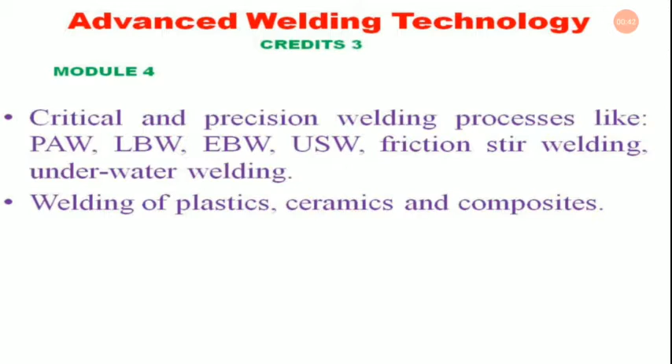So today we will be discussing this welding of ceramics and composites. Let us begin today's class. So today we will be having the class on welding of ceramics and composites.

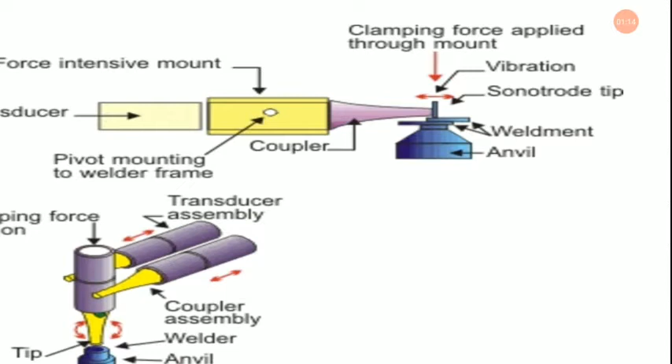So talking about the joining of ceramics, we have this thing. A ceramic material may be defined as any inorganic crystalline material compounded of a metal and a non-metal. Ceramics can be classified as crystalline ceramics and non-crystalline ceramics. Crystalline ceramic materials are not amenable to a great range of processing. Non-crystalline ceramics, being glasses, tend to be formed from melts. The glass is shaped when it is fully molten.

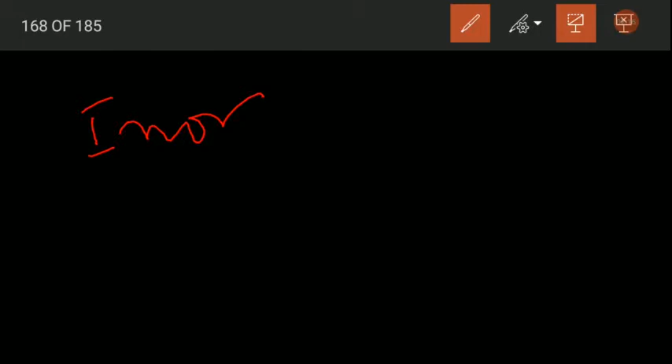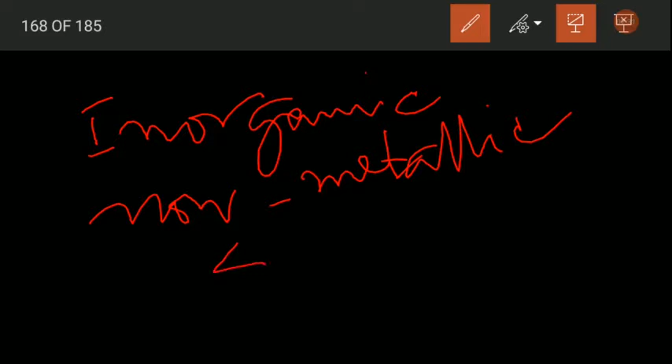Now let us have some more discussion on this basics of ceramics. Then we will move to the joining of this ceramic. So talking about the ceramics, it may be this inorganic, non-metallic, solid, made up of either metal or non-metal compounds that have been shaped and then hardened by heating to a high temperatures. In general, they are hard, corrosion resistant, and brittle as well.

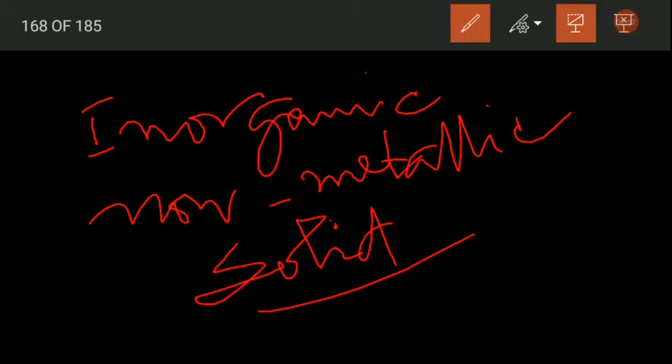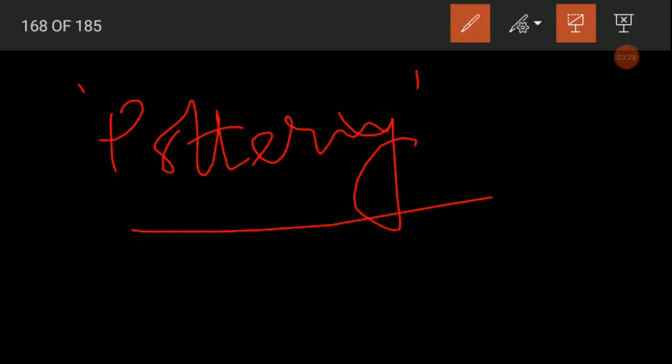Now, ceramic comes from the Greek word meaning pottery. So, ceramic means pottery. The clay-based domestic wares, art objects, and building products are familiar to us all, but pottery is just one part of the ceramic world. Nowadays, the term ceramic has more expansive meaning and includes materials like glass, advanced ceramics, and some cement systems also.

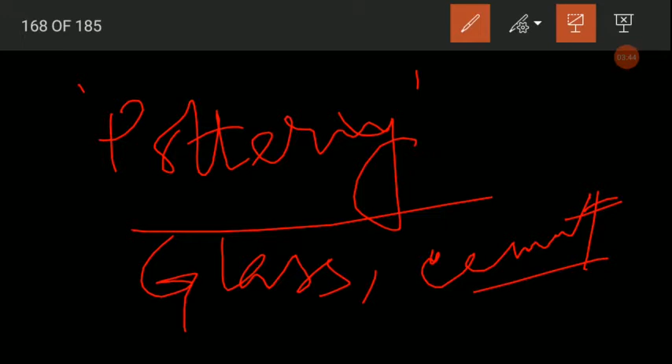Now, traditional ceramics, pottery is one of the oldest human technology. Fragments of clay pottery found recently in Hunan province in China have been carbon dated to 17,500 to around 18,300 years old. So this is the most oldest type of materials known to human being.

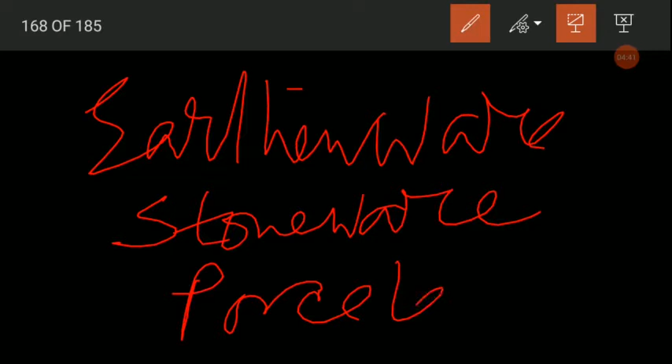Now there are major types of pottery such as earthenware, then you have stoneware and porcelain as well. So you can see earthenware is used extensively for pottery, tableware, and decorative objects. It is one of the oldest materials used in pottery.

The clay is fired at relatively low temperature, around 1000 to 1150 degrees Celsius, producing a slightly porous coarse product. To overcome this porosity, the fired object is covered with finely ground glass powder suspended in water, that is the glaze, and is then fired a second time. Faience, Delft, and Majolica are examples of earthenware.

Stoneware clay is fired at a high temperature, about 1200 degrees Celsius, until made glass-like vitrified. Because stoneware is non-porous, glaze is applied only for decoration. It is a sturdy, chip-resistant, durable material suitable for use in the kitchen for cooking, baking, storing liquids, and as serving dishes. Porcelain is a very hard, translucent, white ceramic.

The earliest forms of porcelain originated in China around 1600 BC, and by 600 AD, Chinese porcelain was a prized commodity with Arabian traders. Because porcelain was associated with China and often used to make plates, cups, vases, and other works of fine art, it often goes by the name of fine china.

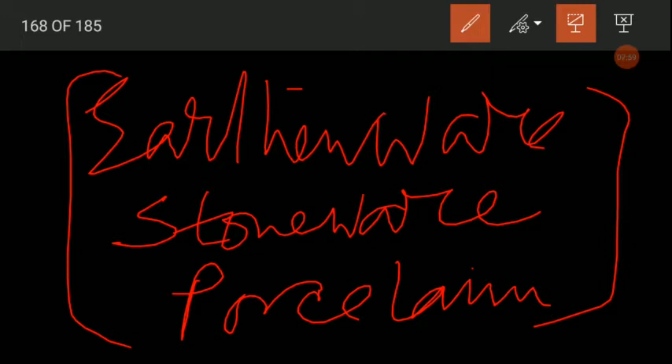Coming to applications, advanced ceramic materials are now well established in many areas of everyday use, from fridge magnets to an increasing range of industries including metal production, processing, aerospace, electronics, automotive, and personal products. In modern medicine, advanced ceramics, often referred to as bioceramics, play an increasingly important role.

Bioceramics such as alumina and zirconia are hard, chemically inert materials that can be polished to a high finish. They are used as dental implants and as bone substitutes in orthopedic operations such as hip and knee replacement.

So you can see we have a clear idea of what ceramic actually is and what are the different types of applications the ceramics are mainly associated with.

Here is a device. First, there are some classifications of the joining of ceramics. One is direct bonding, another is mechanical attachment. In direct bonding, we have two classifications: liquid phase and solid phase.

In the liquid phase, we have adhesives, brazing, and glass sealing, while in the solid phase we have diffusion bonding, electrostatic bonding, and friction welding. I have already mentioned diffusion bonding and friction welding in previous classes. As a recap, there are also many other solid phase joining processes in joining ceramics, but these are the main ones: diffusion, electrostatic, and friction.

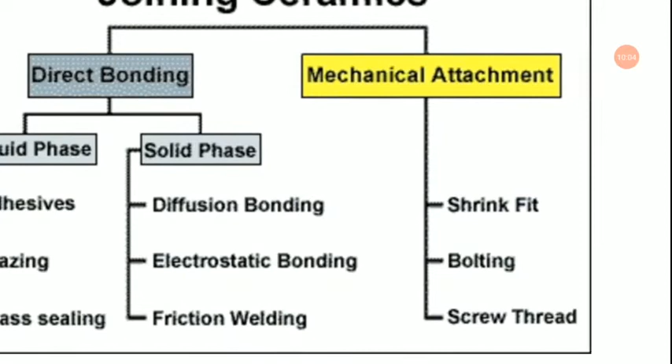Talking about fusion welding, which I have also discussed before, but to remind you: successful use of electron beam welding to form Al2O3-Ta, ZrO2-Mo, and ZrO2-Nb couples with substantial bond strength has been reported since the 1960s. However, the applicability of fusion welding methods to ceramic-metal systems is very limited, so it is imperative to match the melting temperature and thermal contraction characteristics of the pieces being bonded.

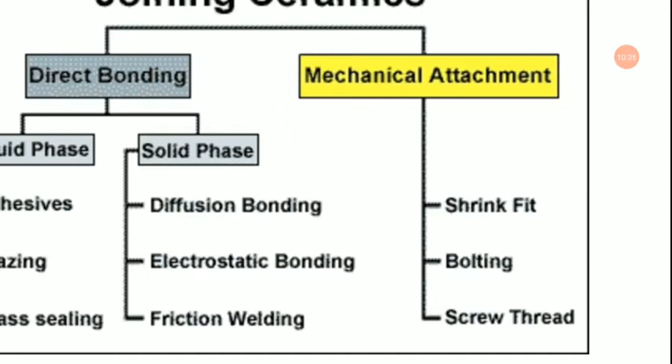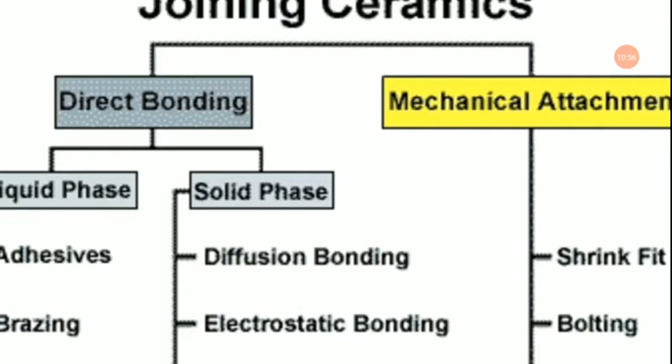Coming to friction welding, which I have also discussed previously along with ultrasonic bonding - these are extensively used in joining ceramics. Promising results in friction welding of aluminium to alumina (Al2O3), aluminium to zirconia, and aluminium to silicon nitride have been reported from Queen's University of Belfast. These three ceramics can also be welded to other metals, but sometimes it requires the use of an interlayer.

This is the interlayer. As you can see, the filler metal melts and joins with the metals. It spreads through the surface and joins through the metal - that is the joining process.

In ultrasonic bonding, joining of aluminum to a number of metals can be achieved in normal atmospheric conditions, while the joining of titanium to ceramics by the same process requires the use of vacuum.

Now talking about diffusion bonding: in this method, the components to be joined are pressed together and subjected to high temperature for a certain period of time. The pressure used must be high enough to cause diffusion to take place at the mating surfaces, but must not cause bulk deformation in the components being joined. The temperature employed is in the range of 0.65 to 0.98 Tm, that is the melting point of the metal in degrees absolute.

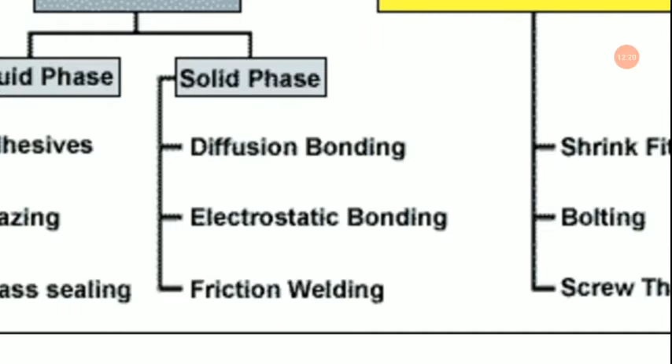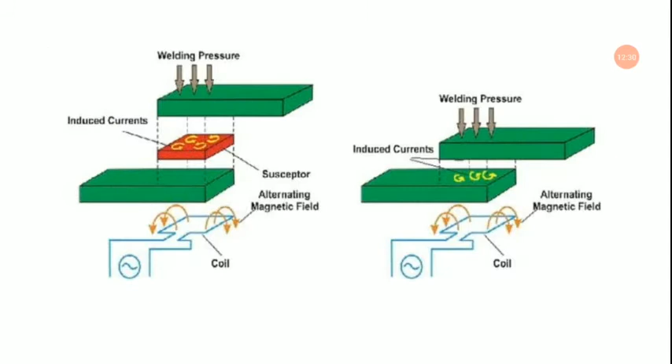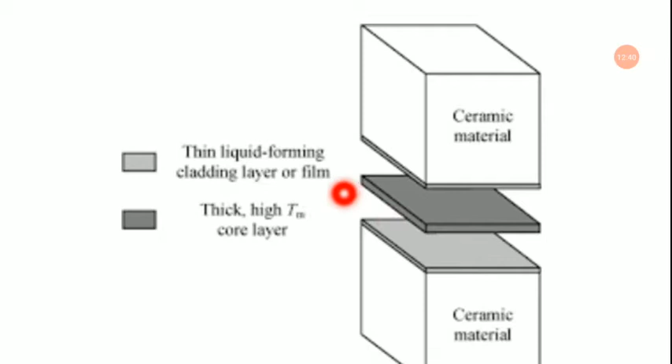Complex physical and chemical reactions take place at the interface to effect a joint, like this one I already showed you. Here you will find this type of picture - actually this will be much more clear. This is the ceramic material joining with a high TM core interlayer. You can find it in between, as you can see.

So this wide range of metals to ceramics, glasses, and glass ceramics can be successfully bonded by this process, provided the thermal contraction characteristics of the parts being joined are matching. You have to check whether their thermal contraction characteristics are matching or not.

Now diffusion bonding via interlayer is this one. Say we are having a layer in between the two joining surfaces, as you can see over here. Now what happens in this method of joining ceramics to metals? A ductile metal interlayer is introduced between the faces to be joined, and thus the application of high pressure is not necessary. This interlayer helps distribute the stresses at the interface, avoiding stress concentration, as well as accommodating some of the differential expansion and contraction of the two components during heating.

If the interlayer temperature is not very high, then it may be possible to bond the components without having any detrimental effects on the mechanical properties of the workpiece, even if it may be of heat treatable alloy.

Stainless steel can be joined to alumina using aluminium as a ductile layer. Gold has been used as an interlayer to bond a number of oxide ceramics and glasses to ferrous alloys.

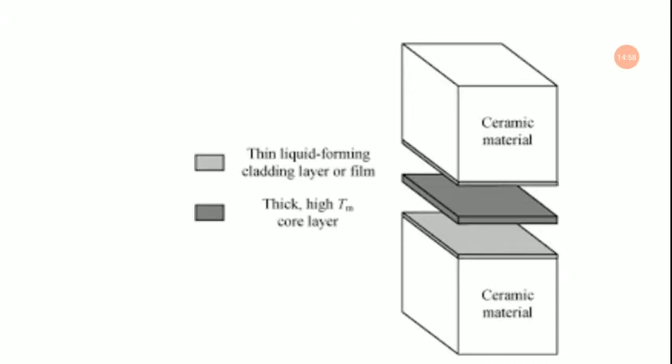Now there are also many processes like isostatic bonding used, then glaze bonding, metallizing, and brazing, also adhesive bonding. So I'm not going directly into the depth of these processes, but you need to know that these types of welding processes exist where you have the opportunity to join ceramics.

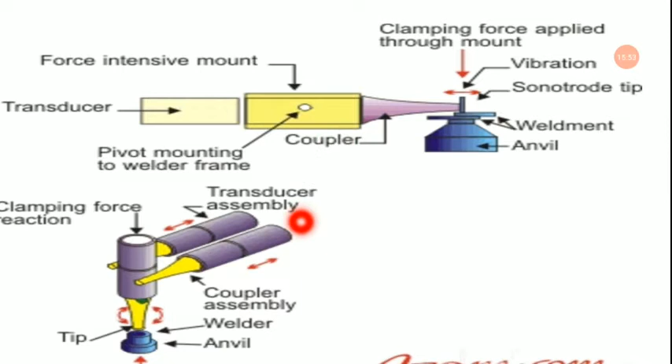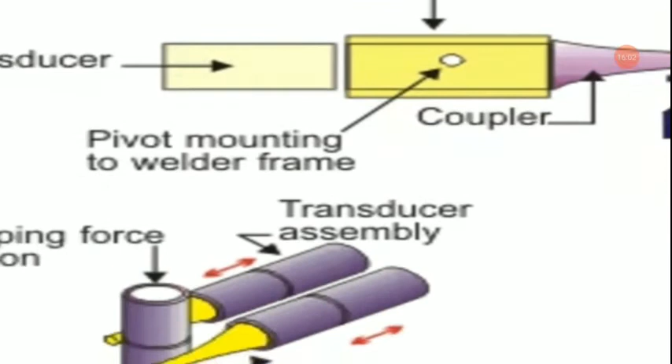Now this is the transducer assembly, as you can see here. Now this is the clamping force reaction over here, this is the coupler assembly, and in the bottom portion you can see the tip, and this is the welder, and this is the clamping force, this is the anvil, as you can see.

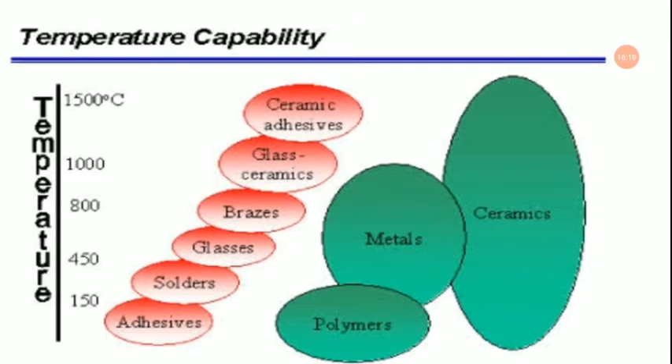Now one more thing I would like to share with you is the temperature capability. So you can see over here, with high temperature, only ceramics can withstand. Ceramic has a wide range of temperature, from around 1500 degrees Celsius to around 150 degrees Celsius, but polymers are not so versatile in withstanding high temperature.

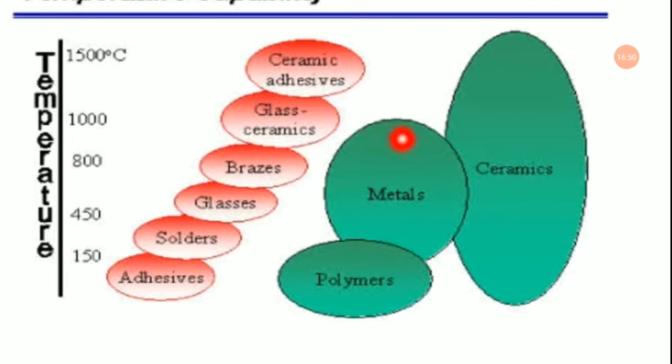So it is better to have polymers around 200 to 300 degrees Celsius only, and metals can withstand up to around 150 to around 1000 degrees Celsius. But ceramics are the materials where you can use for high temperature withstanding - ceramics have this wide range, up to 1500 degrees Celsius.

So this is the ceramic adhesives, then the glass ceramics, then brazes, then glasses, then solders, then adhesives. Adhesives are very prone to high temperature, so they cannot withstand very high temperature - they are good at low temperature, around 150 degrees Celsius or even lesser. Solders, coming after the adhesives, can withstand temperature up to around 450 degrees Celsius. Now brazes, in a brazing joint, can even join up to 800 degrees Celsius or even more.

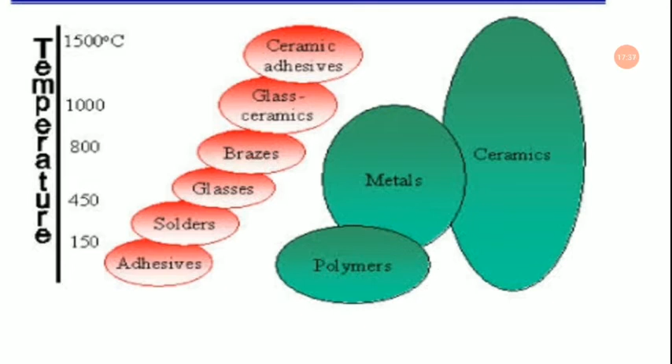So these things you have to keep in mind while performing the joining operations - ceramics are the materials where you can have high temperatures. Now previously I discussed with you about this diagram.

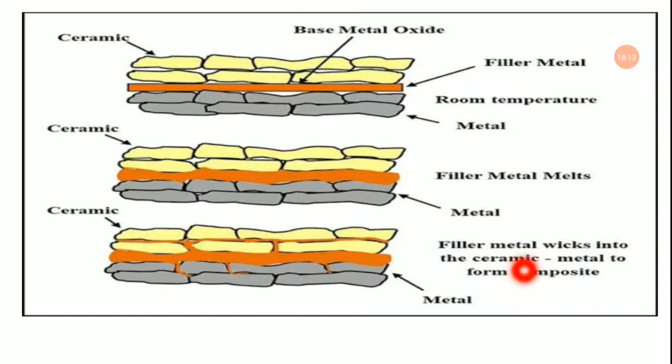This is the base metal oxide, and this is the ceramic on the upper side, with the filler metal in between the two layers. At room temperature this is the metal, and next the filler metal melts between the two layers, the ceramic and the metal. Eventually the filler metal wicks into the ceramic metal to form a composite. Filler metal melts and spreads throughout the inner surfaces of the ceramics as well as the metal surface, helping them bond together.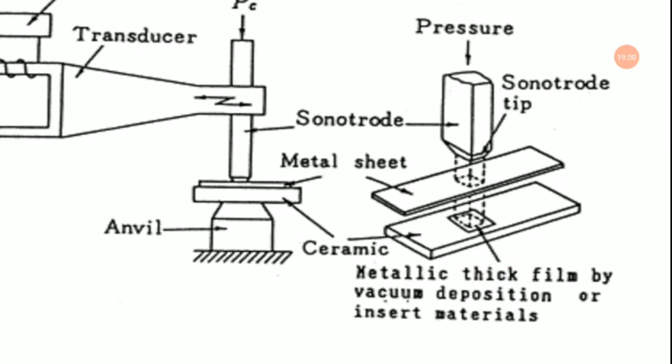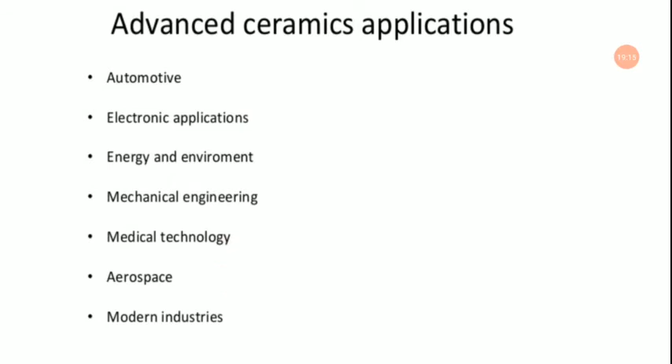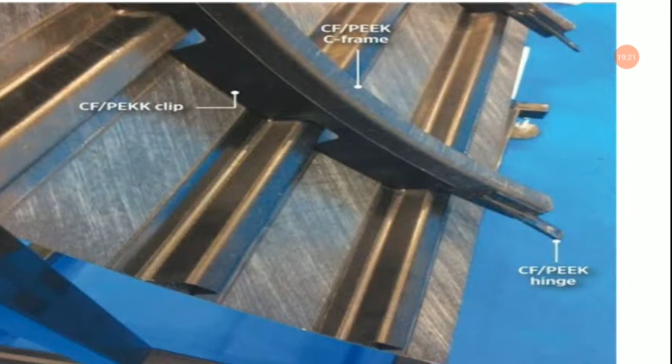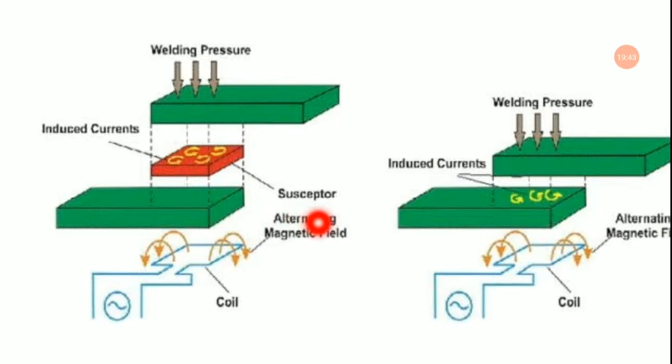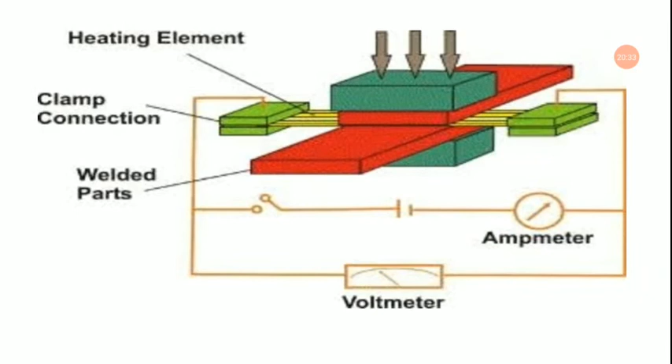So this was what we need to know about the joining and welding of ceramics as well as composites. Composites are nothing but advanced thermoplastic composites having high strength fibers held together by a thermoplastic matrix. The same process can be applied for joining composites - that is friction welding, ultrasonic welding, spin welding, linear vibration welding. The procedures are already the same.

IR welding you can also use, that is infrared welding, and surface heating or laser welding can also be used for composites. So more or less you can apply the same welding processes in ceramics as well as in composites. Advanced thermoplastic composites are becoming more widely used in aerospace, marine, automotive and energy industries due to decreasing cost and superior strength to weight ratio - the weight is much lower compared to the strength, so it can be used over metallic parts.

Advanced thermoplastic composites have excellent damage tolerance, corrosion resistance, high fracture toughness, high impact resistance, good fatigue resistance, low storage cost and infinite shelf life. These thermoplastic composites also have the ability to be formed and reformed, repaired and fusion welded. The welding techniques remain the same - friction welding, laser welding, and much more, as I have already discussed for ceramics.

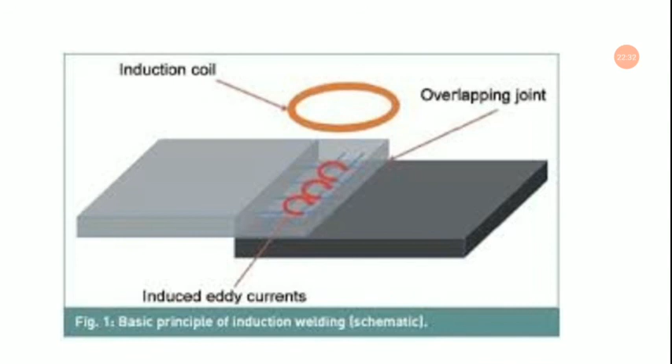So these are the things you need to keep in mind while joining ceramics as well as composites. So today we have completed the joining process of ceramics as well as composites, and we have also completed module 4.